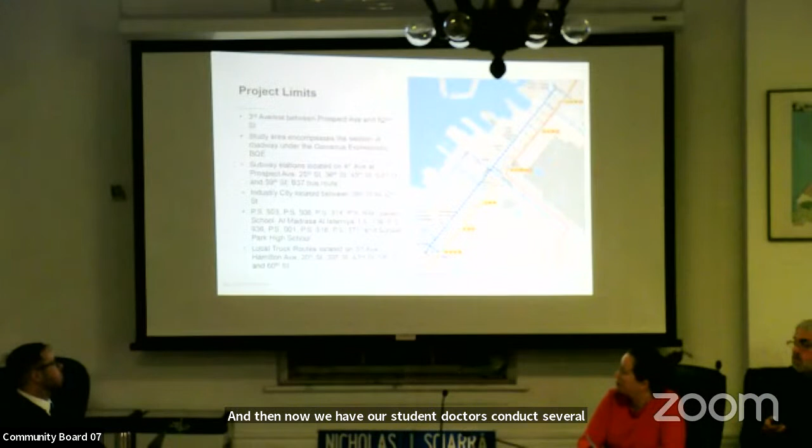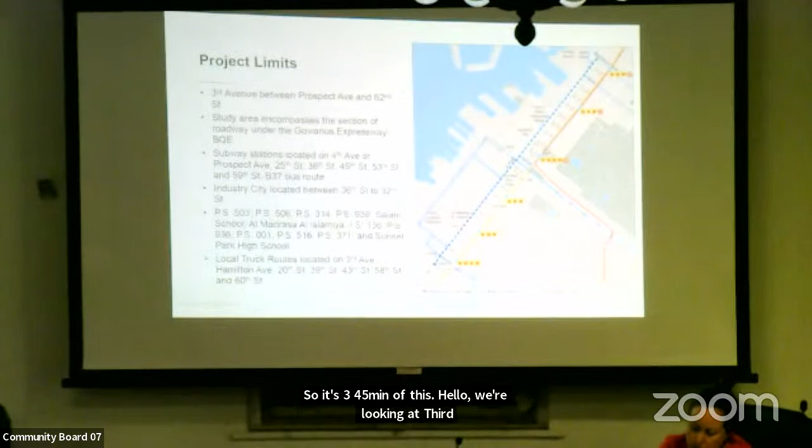So specifically for the project limits of this scope, we are looking at Third Avenue between Prospect Avenue and 62nd Street. The study area encompasses below the BQE Gowanus Expressway, and there are several subway stations located around that, highlighted in the map to the right.

We also have a number of pedestrian generators in the area, so we have a lot of folks crossing Third Ave to get to this location. There are also a number of schools located throughout the corridor, highlighted on the map as well. And there's a local truck route on Third Ave with east-west connections, so lots of trucks right along the corridor.

Hello, gentlemen. Thank you.

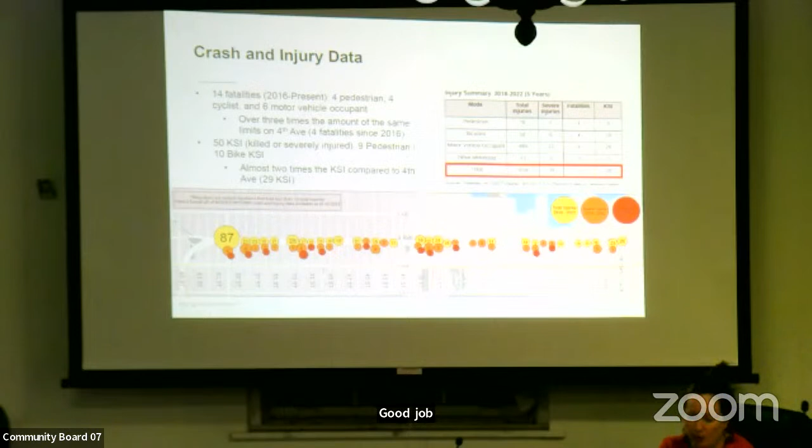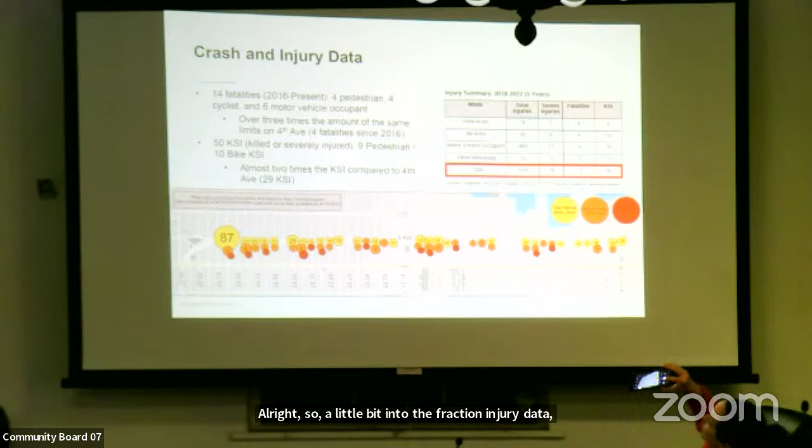All right, so diving a little bit into the crash and injury data, why we are looking at this corridor, noting that there's been a high number of fatalities. To really reiterate how extensive this is, when we compare it to Fourth Ave, which is much more complex with subway stations, etc., we're seeing over 3 times the amount of fatalities occurring here compared to Fourth. Also of note, there's a high number of killed or severely injured crash sites along the corridor, almost 2 times the amount compared to Fourth.

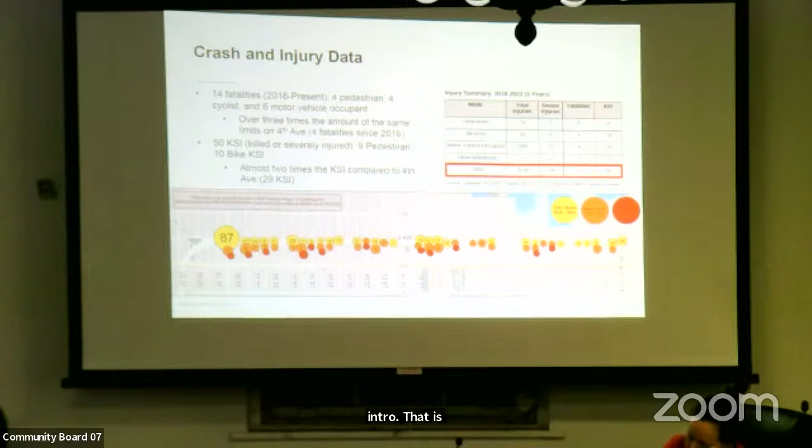So when we look at the types of injuries and crash sites occurring on the corridor, there's a high majority of right angle crashes happening, and that is all motor vehicle occupants. This is indicative of speeding and vehicles running red lights.

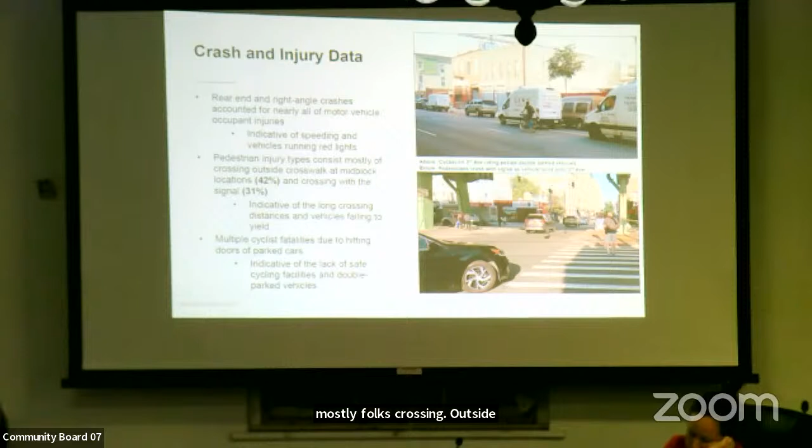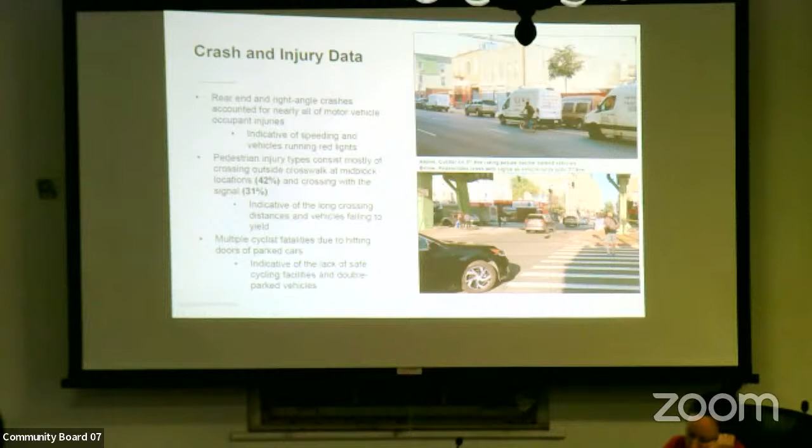Also, the pedestrian injury types mostly consist of folks crossing outside crosswalks at mid-block locations, as well as crossing with the signal, where vehicles are subsequently injuring a pedestrian crossing in the crosswalk with the signal in their favor. This is indicative of the long crossings along Third Avenue, as well as vehicles failing to yield. Finally, noting the multiple cyclist fatalities, mostly due to hitting the doors of parked cars, indicative of the lack of safe facilities.

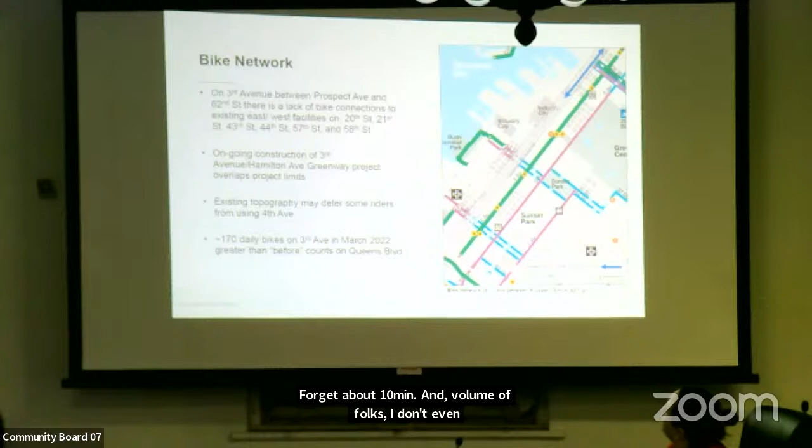When we looked at the volume of folks utilizing Third Ave, we saw an increase in bike ridership. Compared to something like Queens Boulevard, what we're seeing on Third Ave is a much larger number of folks, demonstrating a huge need for safe bike facilities.

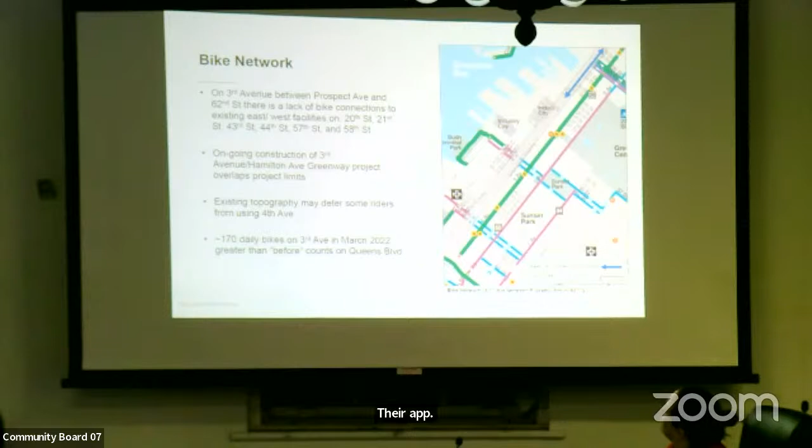So just to provide a little context on existing conditions, we're all aware that the large corridor changes from 3 lanes in the southbound direction between 19th and 54th Street. As you continue south, it changes from 2 northbound lanes to 3 southbound, with a service road on either side. Also noting the Gowanus has 3 lanes in each direction, right above the corridor.

So as I mentioned, we collaborated with Community Board 7 to host a series of visioning workshops to solicit feedback from folks who know Third Ave very well. We had in-person workshops with translation services, and participants were provided a short overview presentation followed by a map and visioning exercise to help us identify safety concerns and themes.

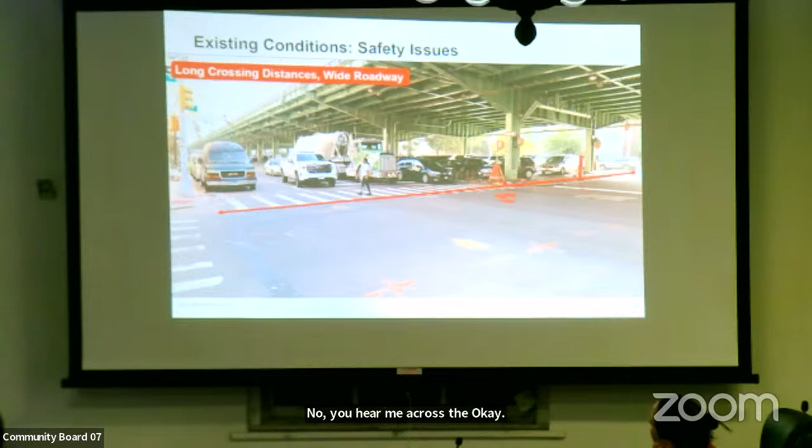So really a call for safer turning calming measures, noting the long crossing distances, especially where you have 3 lanes of traffic in each direction. We had folks asking about crossing distances, saying there's not enough time to cross sufficiently, especially with 6 lanes of traffic, and vehicle behavior, again noting the type of crash data we've seen on this corridor.

So again, reiterating the pedestrian and vehicular conflicts, particularly with turning movements at the medians. Folks again expressed that the medians are insufficient and aren't large enough to provide adequate space for vehicles turning on these minor streets.

And then finally, just noting again, Third Ave is a truck route with high volumes, but folks identify the turning truck movements as unsafe and the roadways in poor condition. And again, welcoming that unsafe vehicular driving behavior where we're seeing trucks double parking on the corridor and loading needs occurring.

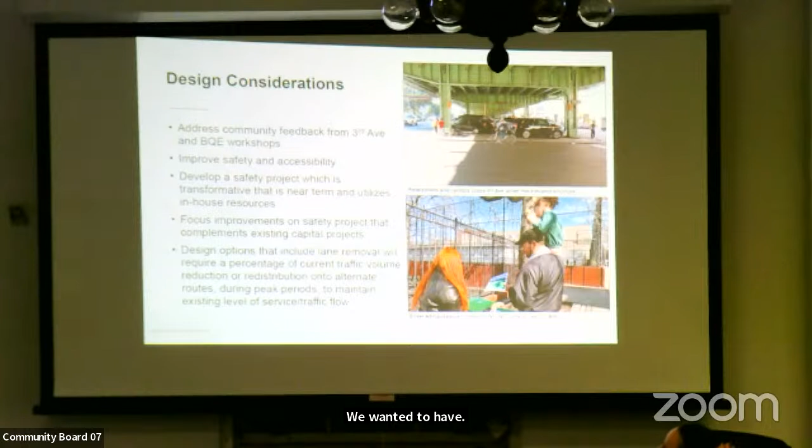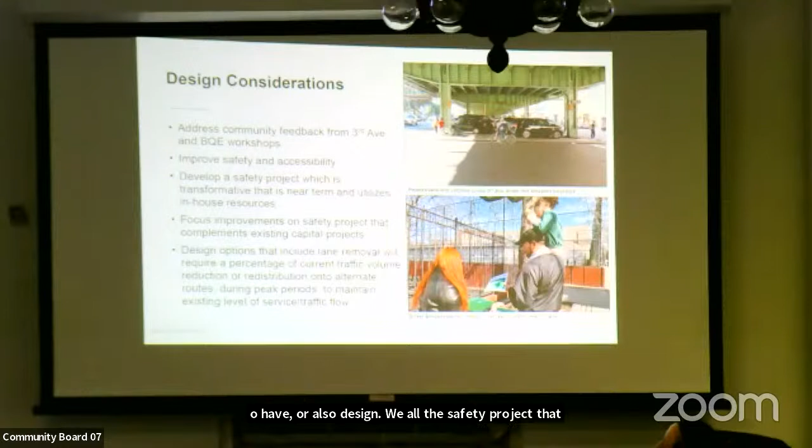That was the perfect time to pause, because I did want to provide that caveat for our design considerations slide. We wanted design considerations that address the community feedback from the Third Avenue workshops we held, as well as improving safety and accessibility issues in the corridor, while developing a safety project that is transformative, near-term, and utilizes in-house resources. It also complements existing capital projects throughout the corridor. Finally, some of the design options here do include lane removal, so there will be a percentage of current traffic that needs to be reduced.

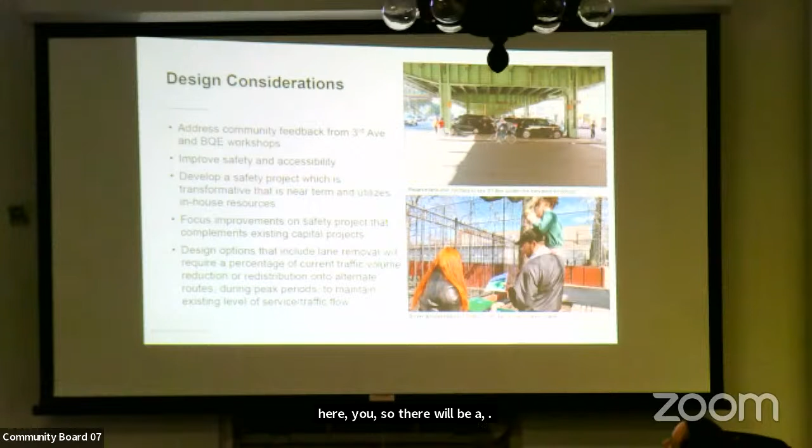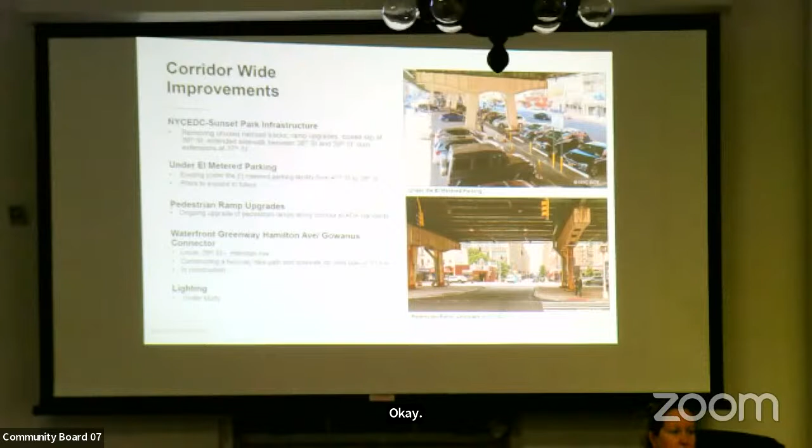Could you go back one?

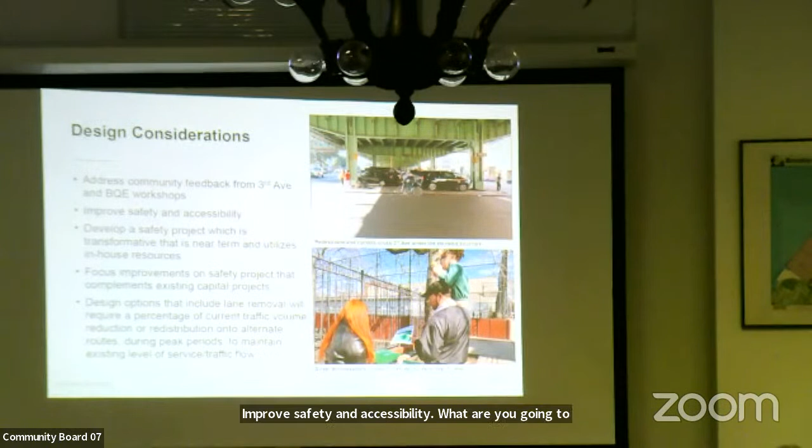Improve safety and accessibility—what are you going to do there? That's what the next slides are about. We'll take your questions after. So the next slides are talking about that.

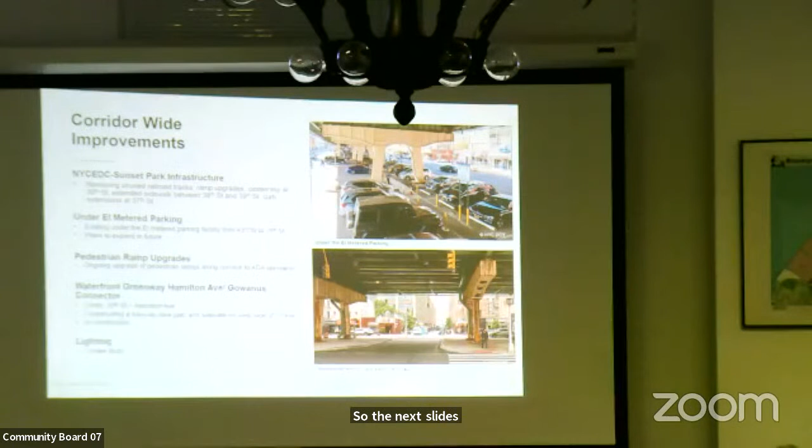Here are the ongoing corridor-wide improvements. These are mostly capital projects that DOT is undertaking. Noting a bunch of these, happy to take any questions regarding any of this, but let's jump into the proposals.

I wanted to note that the design options I'm about to show mainly focus on 29th and 54th Street, because that needs to be the primary focus until we decide for the southern portion—the changing geometry will need to be formulated before we can do that—and also having a coordinated design with the existing Hamilton Avenue project north of 29th.

So, design options—let's go back to the first slide because it was out of focus. Yeah, I need to focus one.

I'll take time to note that the design options here fluctuate from less ambitious to more ambitious, and all of these can be built in-house, though timeline and resource needs will differentiate. So let's look at this.

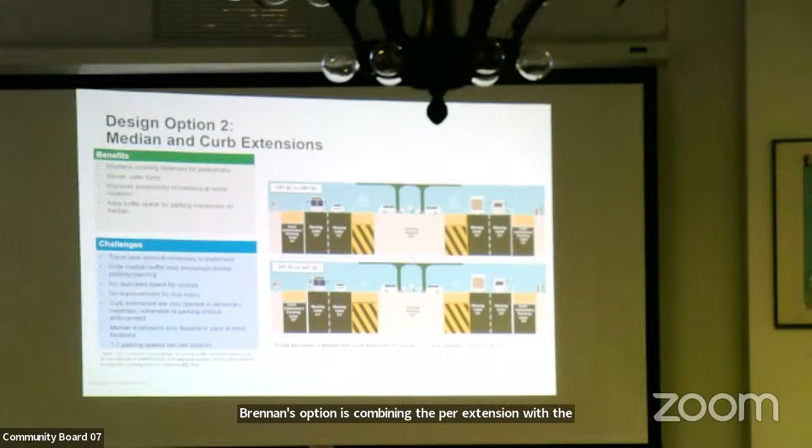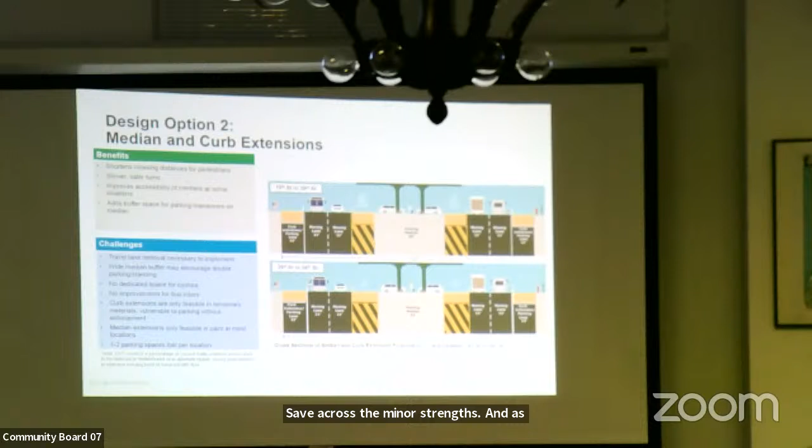Our next option combines the curb extension with median extensions. This shortens crossing distances for pedestrians, providing safer, shorter crossings, and improves accessibility at some medians by offering dedicated space for folks to safely cross the minor streets, adding a buffer to the median for parking maneuvers. One challenge is that it requires a lane removal to implement, and the wide buffer along the median may encourage double parking. There's no dedicated space for cyclists along this corridor, and no improvements for bus riders. Also, some curb extensions won't be feasible to build in concrete due to conflicts with catch basins, columns, and downspouts at the parking median, and some medians may have parking enforcement issues if not enforced properly. Again, there's a net loss of 1 to 2 parking spaces.

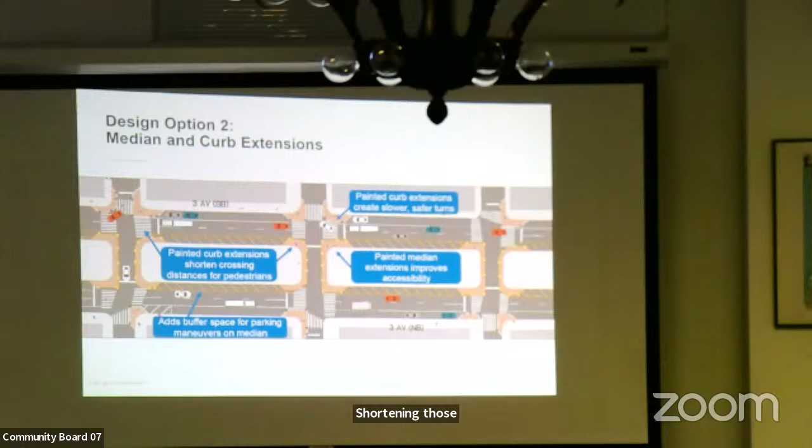Here's an aerial overview showing improved accessibility by allowing extra space for maneuvers at the medians, shortening crossing distances, allowing parking maneuvers at the median with that buffer space, and providing curb extensions to create slower, safer turns.

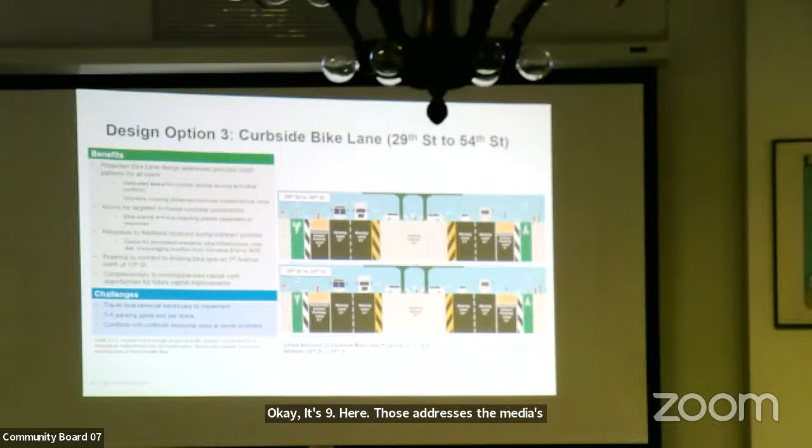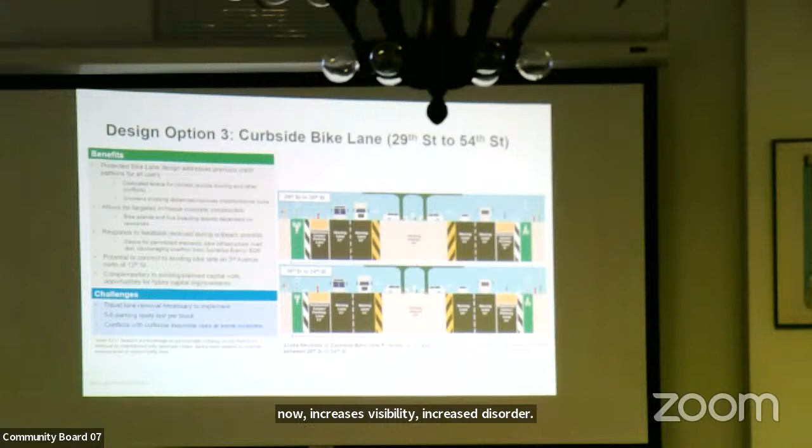Our final design consideration is the protected bike lane. This addresses the previous crash hotspots we've seen for all roadway users, offers a dedicated safe space for cyclists along Third Ave, increases visibility, and creates shorter crossing distances. It also allows for targeted in-house concrete construction, particularly for bike and bus boarding islands, which can be constructed in concrete depending on resources.

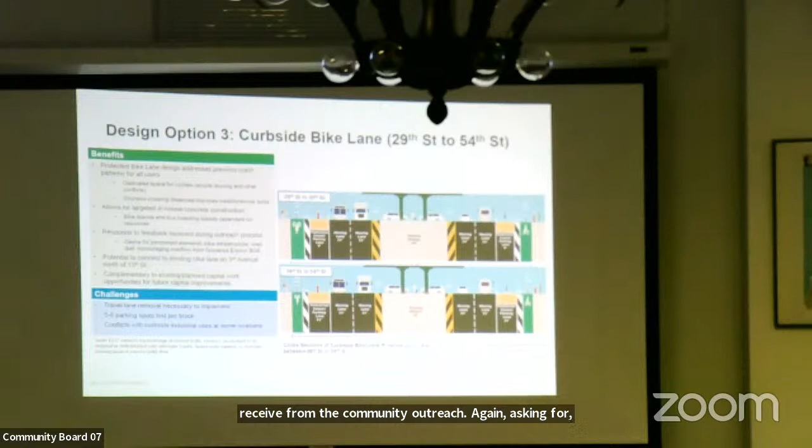This also responds to direct feedback from the community outreach, asking for more materials, dedicated space for folks, and shortening crossing distances, while discouraging overflow. It also gives us the opportunity to connect Third Ave to north of 29th Street, and allows for improvements on existing capital work along the corridor. Some of the challenges for this option are that it will require more to implement.

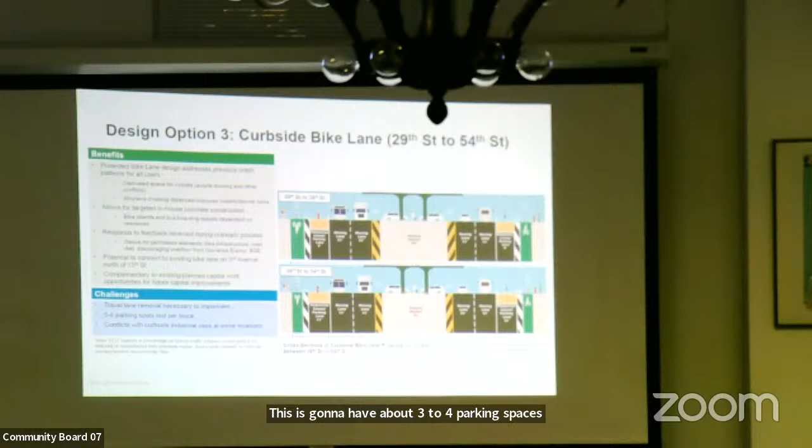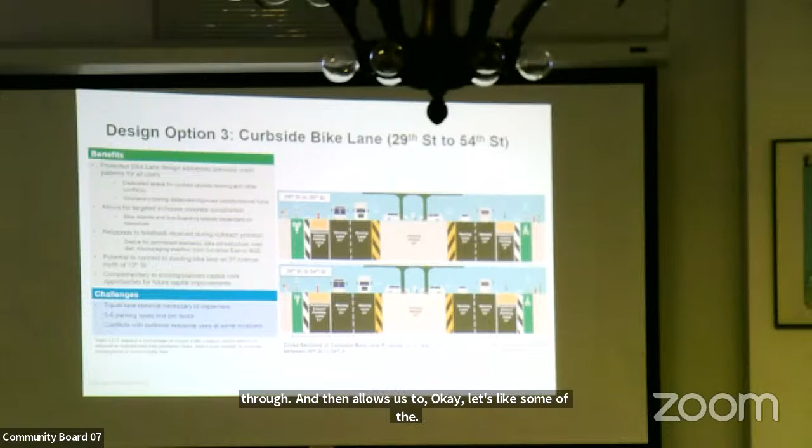This is going to have about 3 to 5 parking spaces per block, and in some places this will conflict with the industrial uses.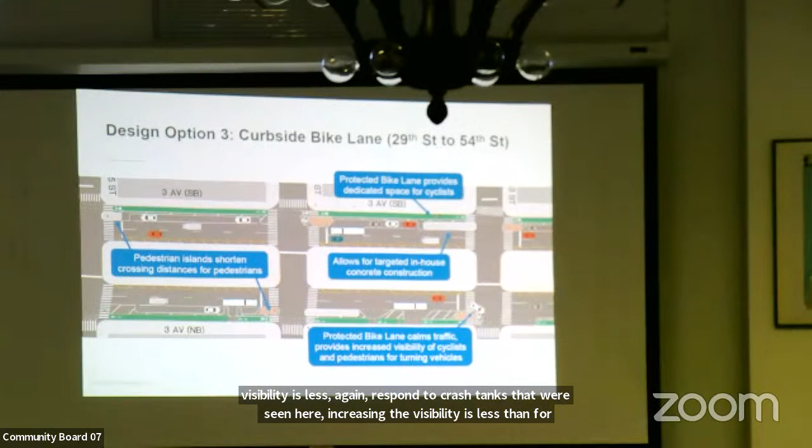Giving an aerial overview here, the protected bike lane provides dedicated space for cyclists, responding to the crash types we're seeing by increasing visibility of cyclists and pedestrians for turning movements, shortening crossing distances for pedestrians, and allowing us to have targeted in-house construction going forward.

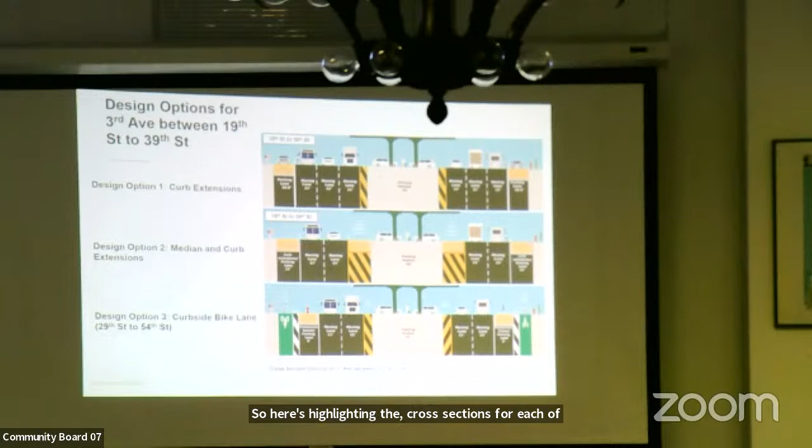Here we're highlighting the cross sections for each of the design considerations and design options. I wanted to note that for the portion south of 39th Street, it varies slightly because the parking median is about 12 feet bigger.

So discussing next steps: we're going to continue coordinating our efforts with the BQE team. Next week we'll be present at the BQE South workshops. In the spring of 2024, the design concept of the BQE plan will be released, and DOT is going to present back to CB7 with the corridor street improvement plan. We will simultaneously begin developing the portion south of 54th Street, as mentioned, to 29th Street.

Then in the summer and fall, plans for implementation, with exact limits and resources to be determined. In 2024 and beyond, we'll implement additional phases of Third Avenue, as well as continue coordinating with ongoing capital projects and more capital efforts along Third Avenue.

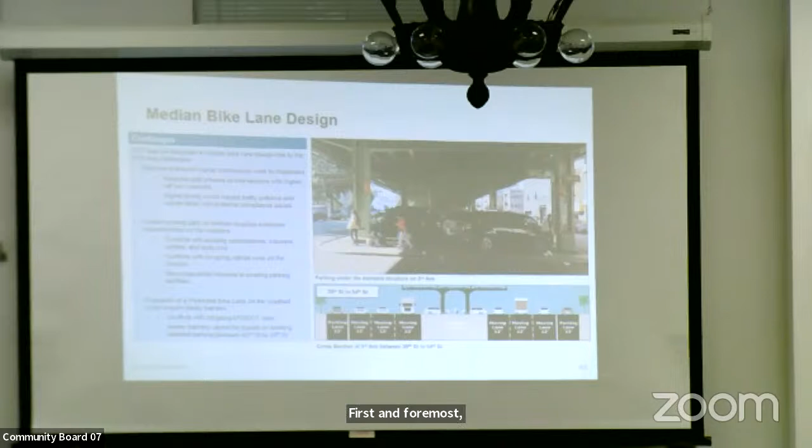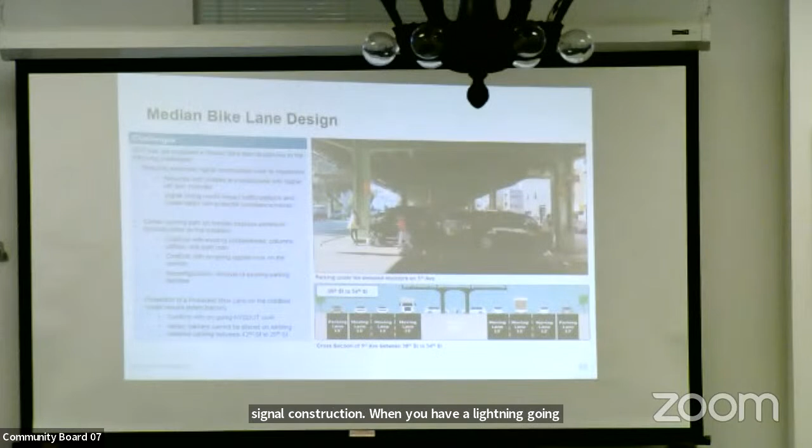So we looked at that, and that's something that's been in the BQE workshops and BQE South workshops, at least some of the early workshop conception of this. There are a number of challenges. First and foremost, it requires extensive signal construction to implement. When you have a bike lane going through the middle, you have to have what we call split phases, so you have to hold turning cars while cyclists go through. It's going to back up like any left-turning vehicle in those left turn bays. A lot of signal construction. Also, as we're looking at with this median path here, a lot of construction, a lot of reconstruction.

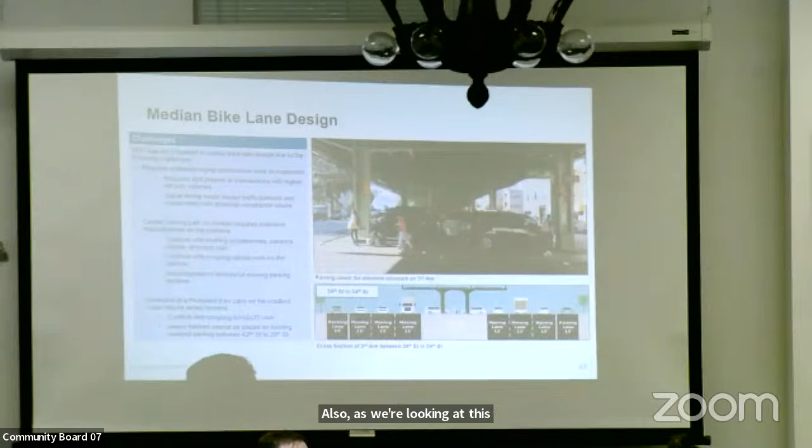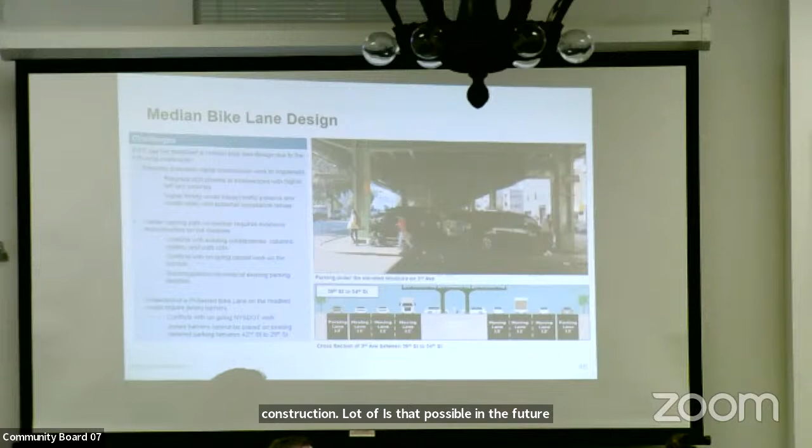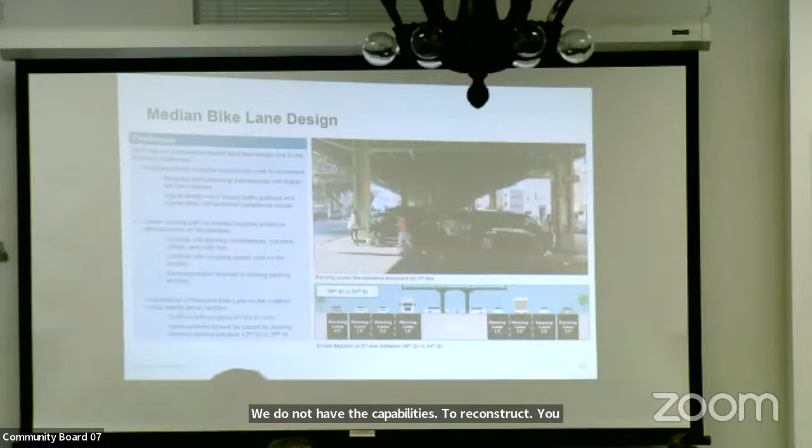Is that possible in the future? Yeah, but that's a capital effort. Because if we want to do something, put some benefits out there, we do it in-house. We do not have the capabilities to reconstruct 20 blocks of these, so they're big medians. It would conflict with ongoing capital work on the corridor.

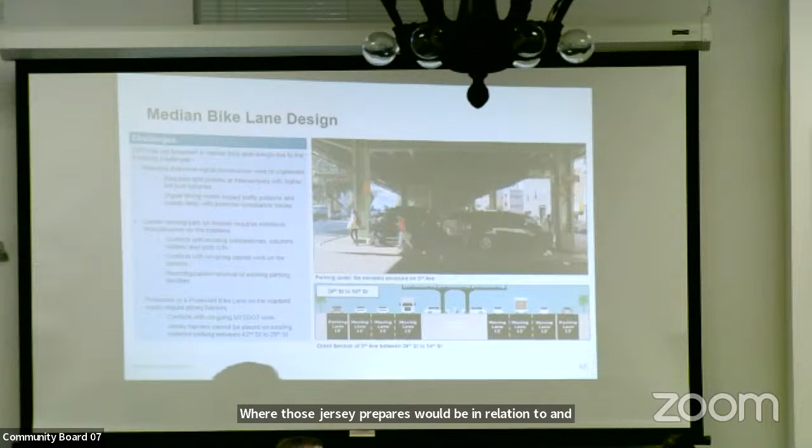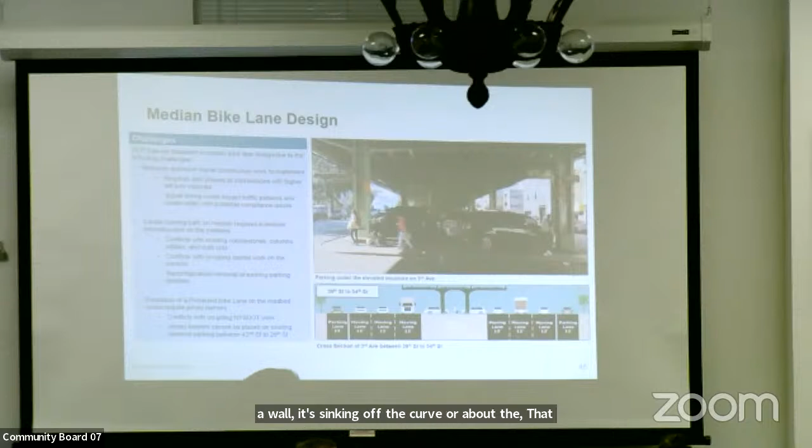And then finally, if we wanted to do a bike lane and wanted it protected, how would we protect the median side bike lane? We would use Jersey barriers like we're doing throughout the city. Where those Jersey barriers would be in relation to where the state vehicles need to be for maintenance, BQE, they conflict. Like a wall that's about 10 feet off the curb, right off the median for the bike lane, that would be exactly where a vehicle needs to park for the state to do the painting, the maintenance, the lights, etc. So we looked at it.

It's something that was brought up at the workshops, at BQE workshops. That would require a whole big capital project. That's not something we can do.

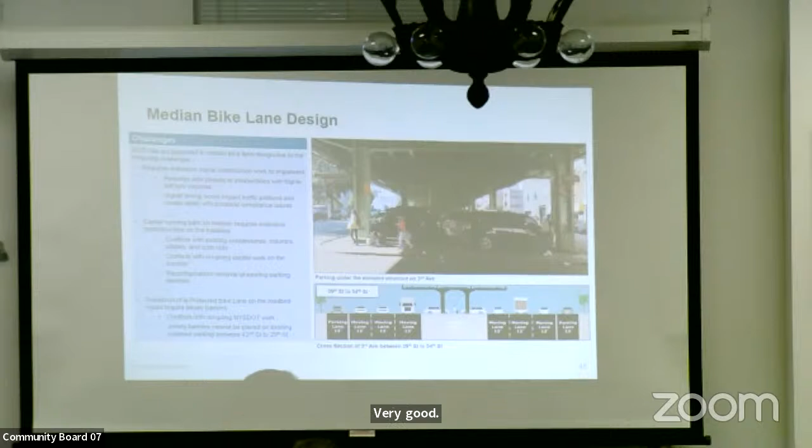So speaking of capital, I know that DOT with the state applied for the Reconnecting Communities grant. This is part of the infrastructure spending bill, and money that's under the IRA. Community Board 7 did ask for a copy of the proposal because it does impact our area. We've not received that. In the Reconnecting Communities grant, I believe it's in the order of $135 million, one-time $50 million. If New York City does receive that money, and it does include our corridor, does that...

Is that part of that proposal? I'm not sure, I don't know how to answer that now. Yeah, so we can get back to you. You can email me your question, I'll get back to you. So the question is, can we have the proposal that was submitted that has design treatments? We can't give you the proposal. However, CB7 will have the opportunity to make comments in the community outreach section.

So the question is, what does it take to get the capital needed to do the type of design improvements that you guys have said you can't do, and trucks that you said... where's that capital? I think the capital question is a little bit independent of what we're proposing here. My point is that capital timings, even for the fastest capital projects for corridor improvements, as you may know, are a decade or more in the process.

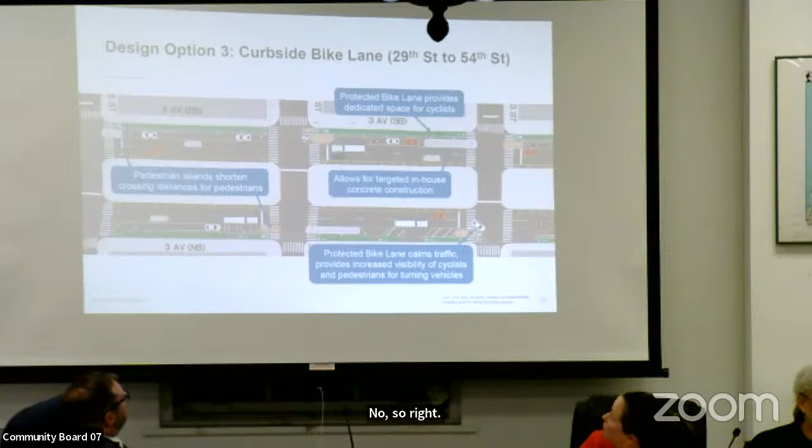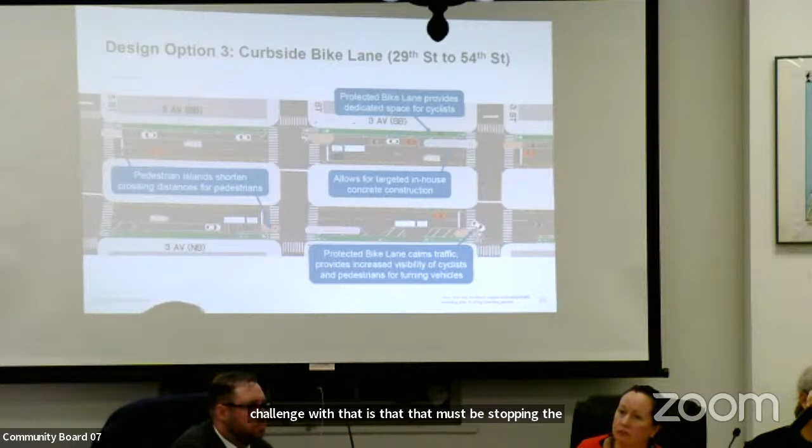Okay, so there are a couple different options. One option is to add bus boarding islands. Now the challenge with that is the bus would be stopping in the travel lane briefly while it loads and unloads passengers. The other option is that the bus would pull to the curb, so there would be more of a buffer space in that spot where the island is.

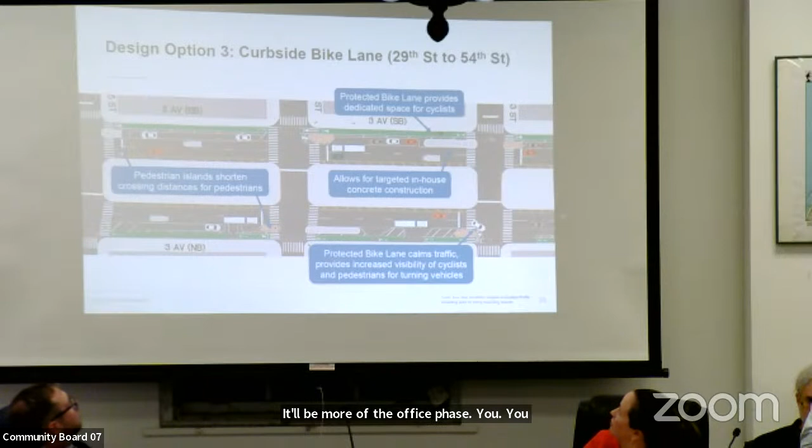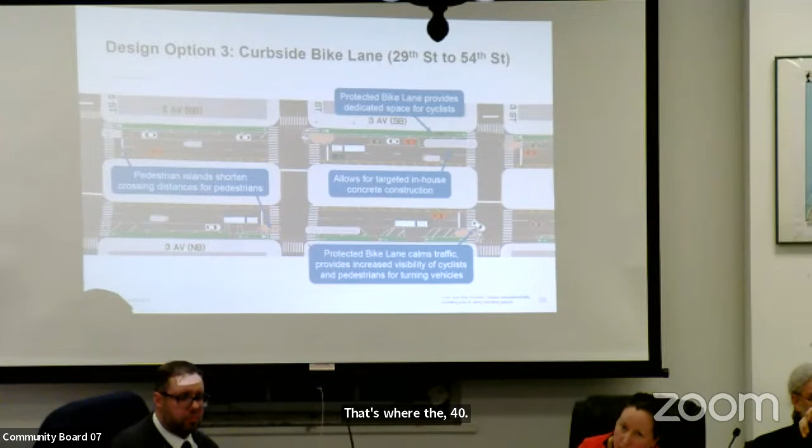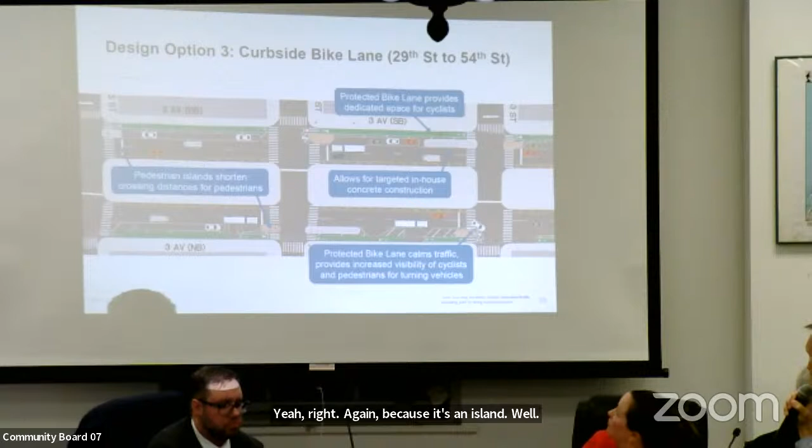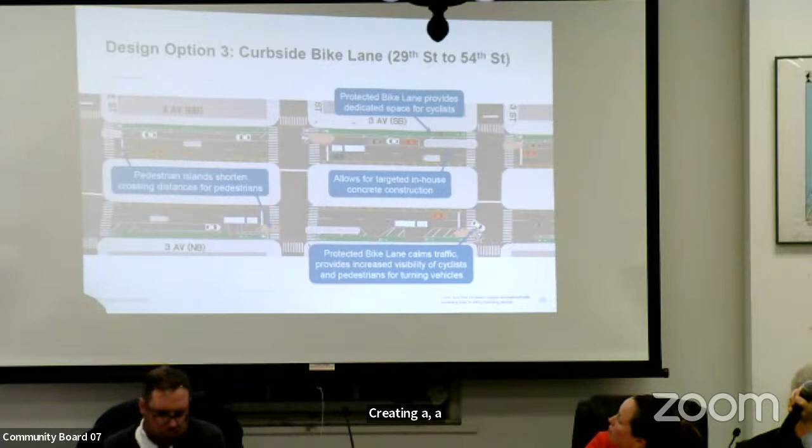I like that, where we're looking, that's where a bus boarding island could be. Again, because it's an island, quote unquote, a floating piece of concrete that's away from the curb, we do not have the drainage concern that we would to create a large curb extension, or bus bulbs as they're called. We can't do that, in short, story.

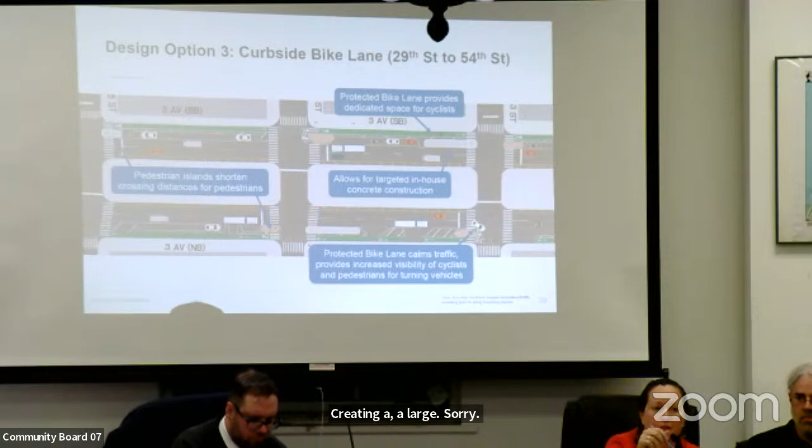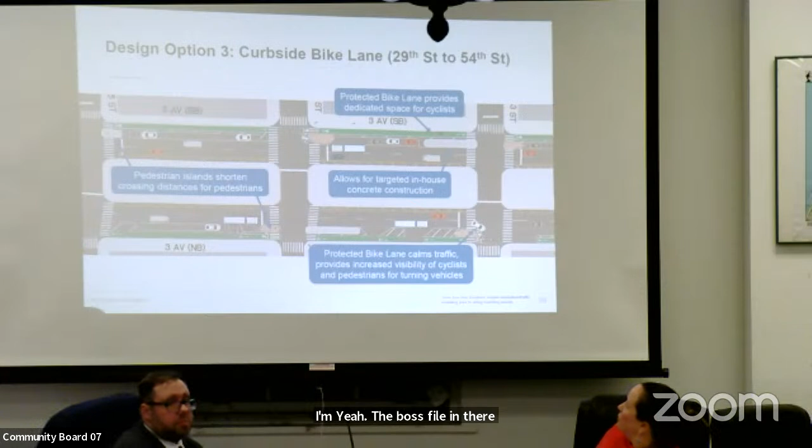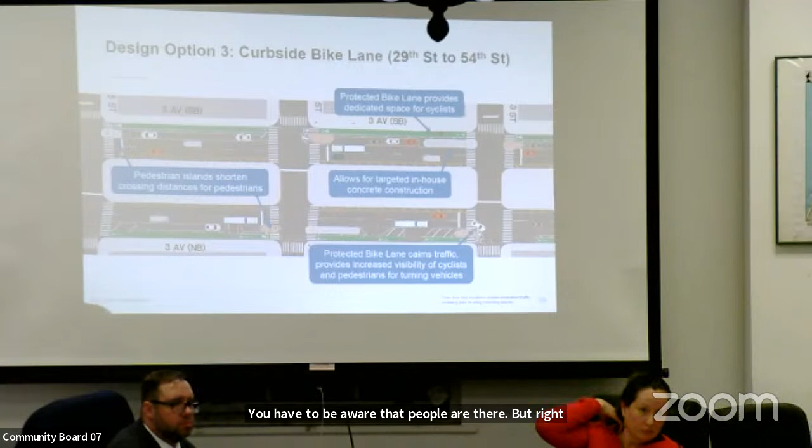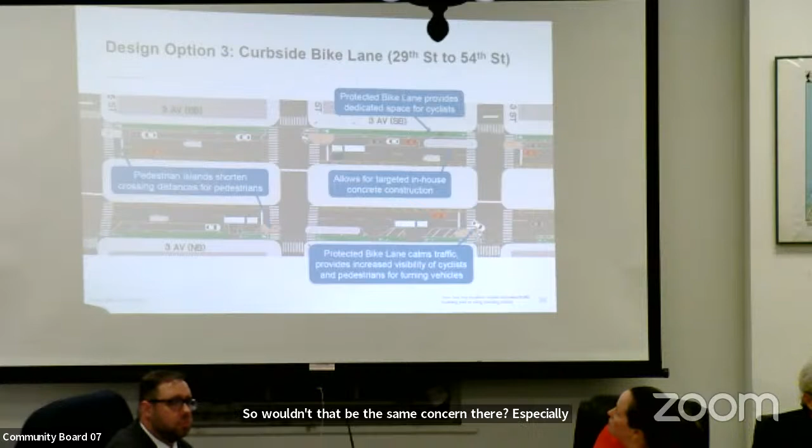So when you put the bus island there and you have the bike lane, people would still have to - bikes would have to be aware that pedestrians are there. Like right now on 4th Avenue, bikes in the bike lane when pedestrians are trying to cross get hit constantly because the bike keeps going. So wouldn't that be the same concern there? Especially if people are trying to get on and off the bus. The B37 is used a lot by seniors and students, so I think that would be quite dangerous to have the protected bike lane and the B37 together.

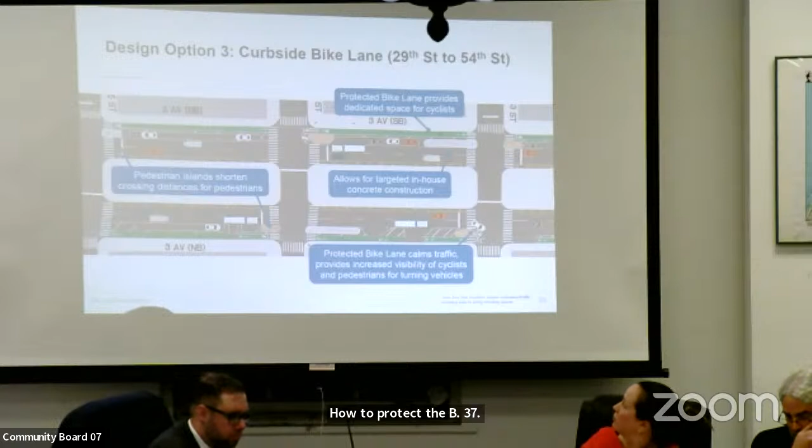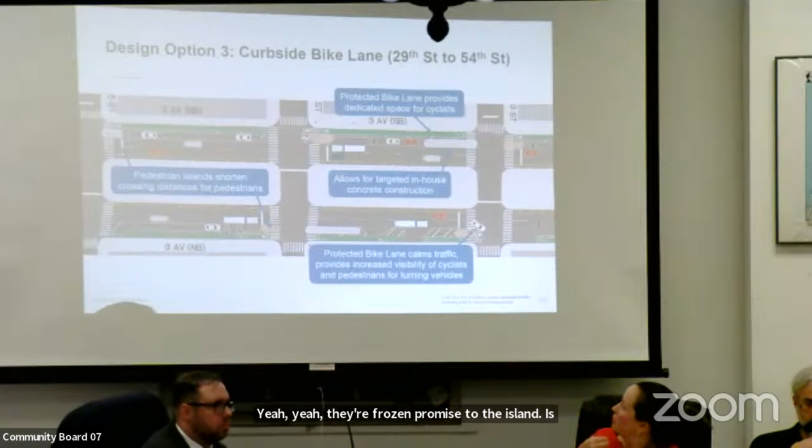Yeah, there are pros and cons to the island. The pro is that if the bus doesn't pull over the curb, doesn't have to pull into traffic, and then the pedestrians get off at the island, there's a short crossing. But they have to cross with a bike.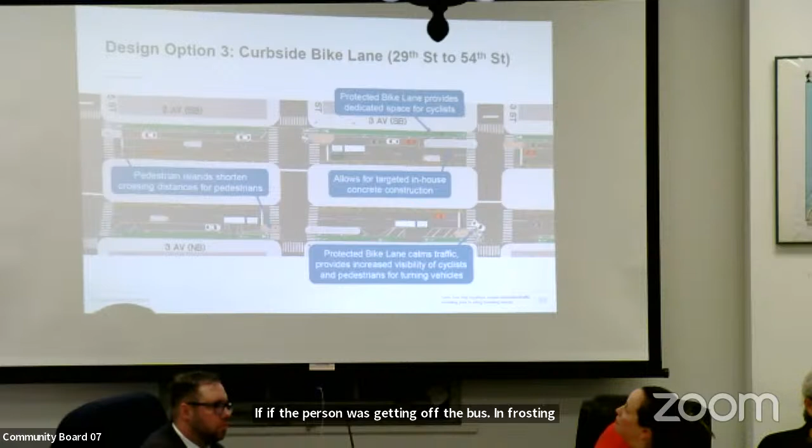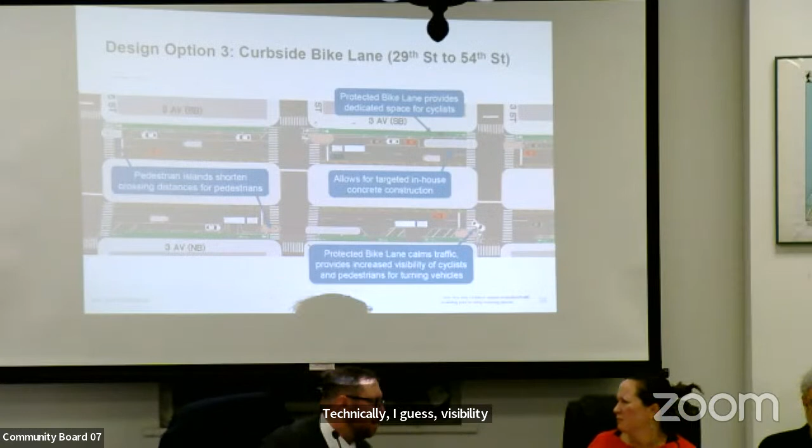Yeah, right now bikes are very disrespectful on 4th Avenue. And if the person was getting off the bus and crossing at the crosswalk, technically I guess they should wait for the light, but there would be very good visibility for bikes before you cross back to the curb. But if you wanted to minimize any risk for transit users, then the bus needs to pull back to the curb and then pull back into traffic, which could slow the bus down.

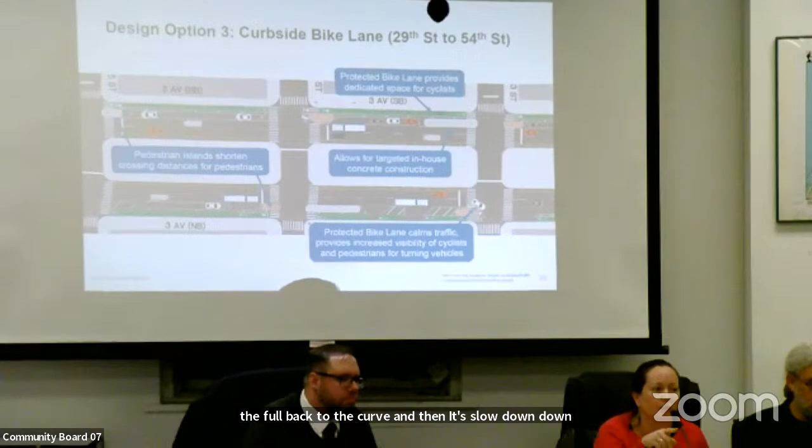I wanted to say, when it comes to the schools, I know in Puerto Rico they don't have too many highways, there's not so much streets, there are highways. And by every school they have traffic lights or signs that say you have to go slow, you have no choice, you have to slow down. And as soon as you pass the school, then you could pick up speed again, because the speed limit slows down wherever there's a school. Even if the school's in a community, the traffic is slowed down, and they have all these things. Maybe that's something to consider, because the streets over there, the main streets, are highways.

Yeah, so we do have school slow zones throughout the city at schools. The issue is enforcement - you put up the sign, say 'drive only a certain speed here,' but if nobody's enforcing it, it's not really that effective.

Right, and especially, well, not on Third Avenue, but the cross streets, that's why we were talking about speed humps or speed reducers. On Third, we cannot put speed humps because it's a truck route and it has multiple lanes in each direction. But on the cross streets, we can investigate speed humps.